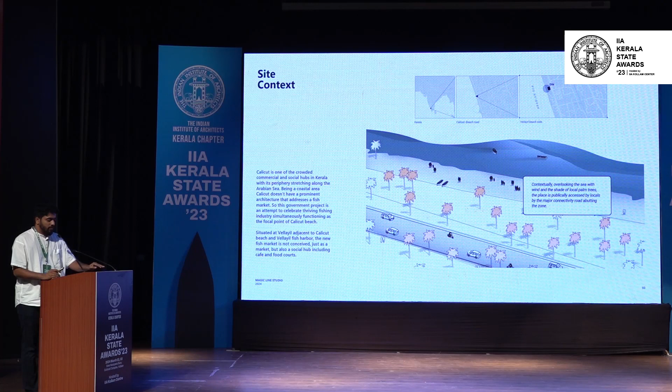The whole fish market, the harbor, currently has only wholesale selling, and fish comes from various states too - Tamil Nadu, Karnataka, Andhra Pradesh - but it's only for wholesale selling. The neighborhood people don't have access to that. So there was a need for a retail fish market there.

You can sum up the culture of Calicut in basically 2 F's - that is the love for football and food. So the crazy brief that we had got was, along with the fish market, we wanted a food court also, where fresh coastal cuisine was served.

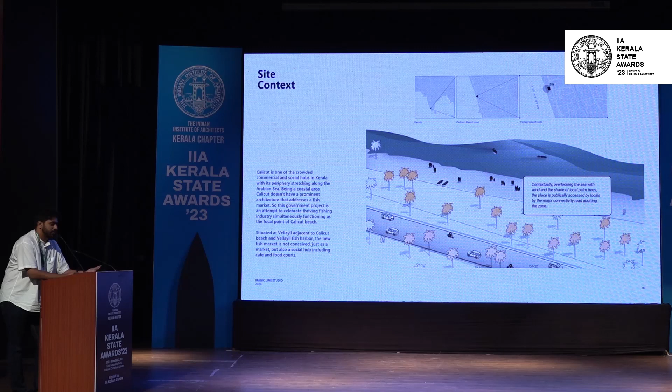So this was the main brief, and along with that, from the fisheries department, the chief engineer, everyone was there when the brief was given to us. The site is facing the Arabian Sea, and as architects, we came back to the studio and started brainstorming on the various possibilities.

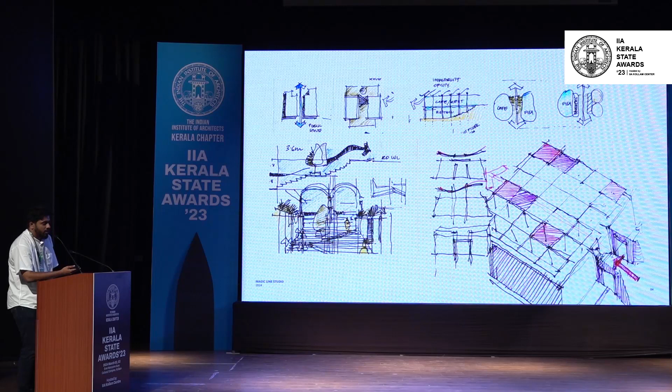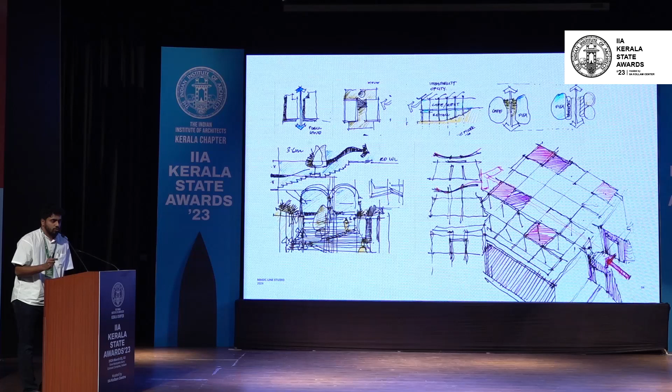There was this level difference from the main road to the site. We wanted to utilize that level difference, and moreover, we wanted the building to be a social or a public space where people can easily move in.

The main challenge was we had functions of two completely different programs, one being the fish market and one being the food court. So we conceived it as two different blocks in the initial stage itself, and we thought of creating a celebratory spine connecting the road, the street, towards the beach side.

We then kind of tied down the two blocks in an undulating roof form. So this was the main idea behind it. And as a result of this process, we got a public space that was very inclusive and participatory in nature.

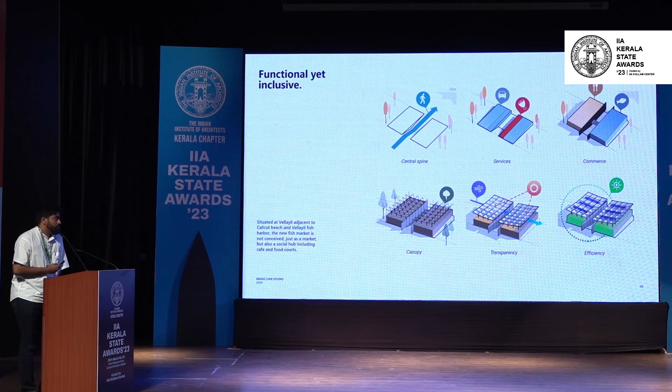Since the site is exposed to an area where harsh weather conditions can be expected, we thought of giving an extra protective barrier or skin, both on the vertical planes and the horizontal planes. We didn't want it to be very aesthetical in a very technical angle, so we tried to seek inspiration from various natural features, staying true to the program of the building and also to the context. As a result, we get this floor plan.

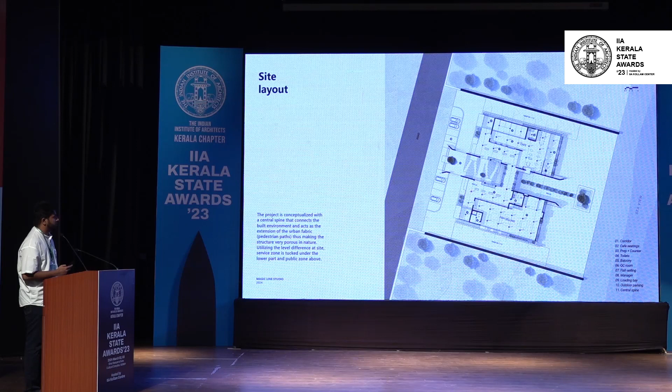This is the road, and as you can see, the central spine rightly frames the view towards the sea from the street, and on both the blocks we have one food court on one side and fish market on the other end. In the lower level, parking and various supporting facilities happen.

As I had mentioned earlier, for the protective barrier, we tried to seek inspiration from the most common landscape we observe in Kerala - we have a lot of coconut trees. So we wanted the public to have the feeling of walking under a tree. This, in a nutshell, offsets the overall carbon footprint of the building. It harvests around 65 kilowatts of solar as designed. Now the technology has improved much, but I think this will be enough to offset that.

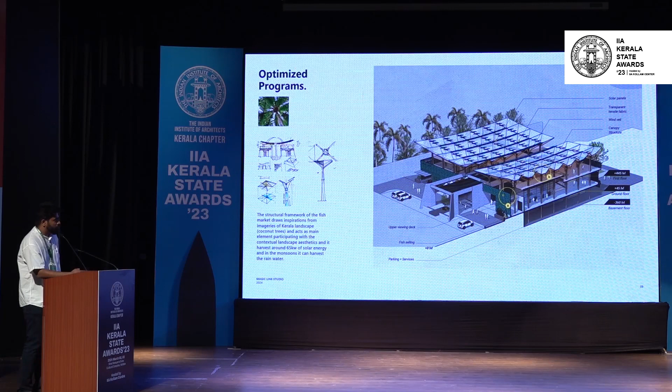So we introduced thin aluminum foils which move as per the wind energy, because the context is very windy in nature since it's a beach area. So this kinetic facade always adds to the overall value of that.

So I'll show the walkthrough.